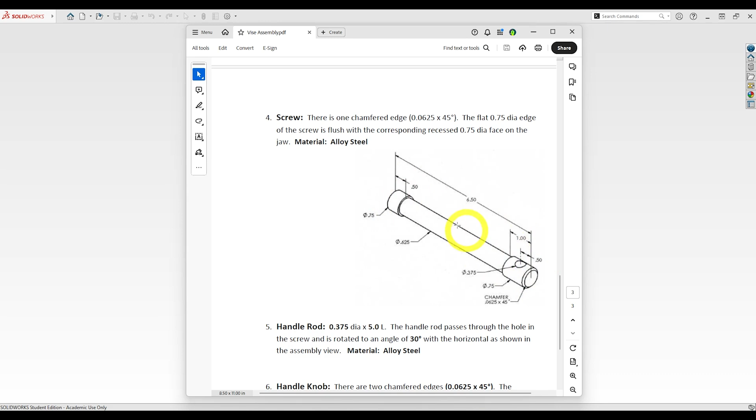Welcome everyone to our next video tutorial where we're going to make the screw for our vise assembly. Looking at this screw, probably the easiest way to make this is to revolve it. So I'm going to cut it in half, draw half of it, the top half, spin it around itself, and then come back and do the hole going through the middle. Let's go ahead and get started.

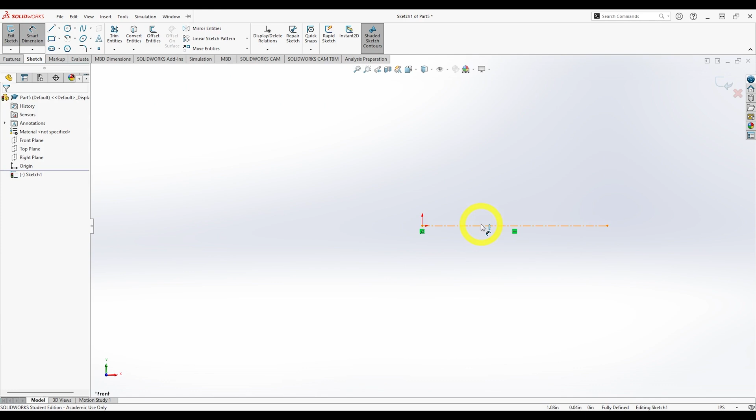Go to new part. Sketch, front plane. I'm going to start with my construction line going down the middle, and I'm going to dimension that real fast. Then I'm going to go ahead and draw my shape.

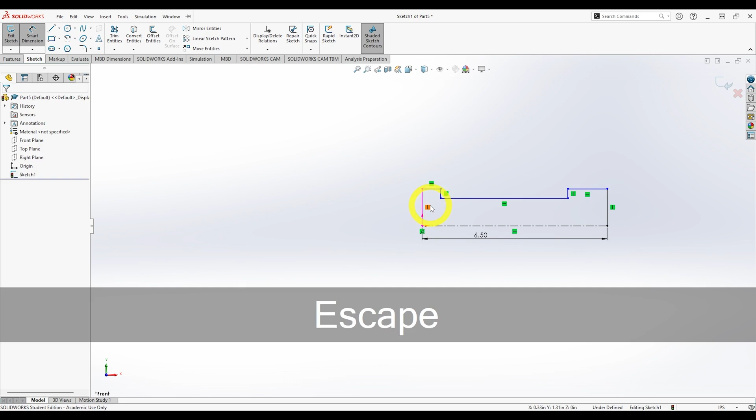All right, let's go ahead and dimension this. I accidentally selected the center point, I want to select the line instead. Remember, if I stay above my construction line, it's essentially a radius. If I go below it, it becomes diameter, which is what I want.

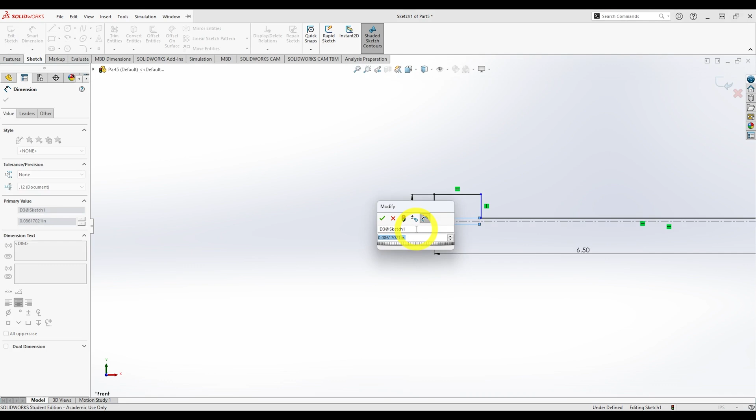And then this is also 0.75, so I'm going to just click on that and click that dimension to make it the same. All right, let's go ahead and do our horizontal dimensions.

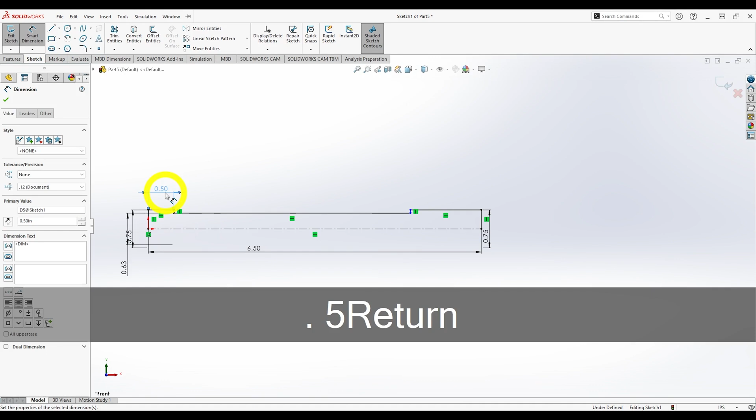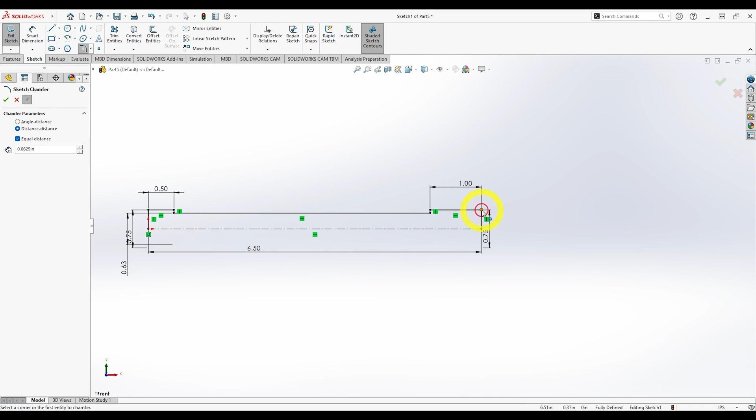And then lastly, we see there's a chamfer here at the end, a 0.0625 inch chamfer. So I'm going to select the drop down where it says fillet, and go to chamfer. Oh, I gotta type my dimension first. All right, and there we go, we have now our chamfer.

All right, let's go back over to features, revolve. This is just going to draw a line across the bottom, which is perfectly fine with me. And I'm going to check, and there we have our screw.

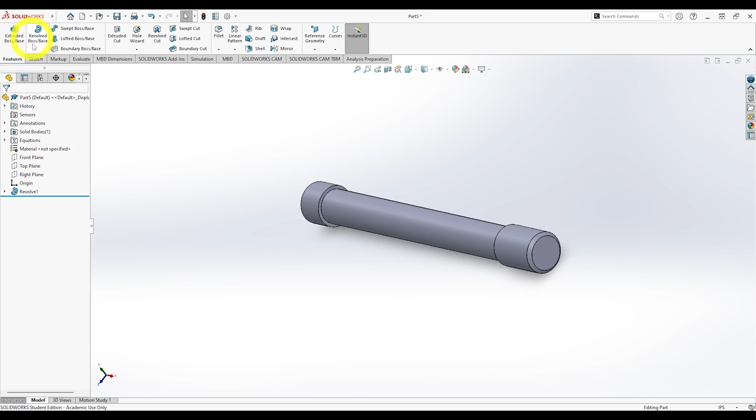Now I need a hole going through the middle. So I'm going to go to sketch, and I need to have a work plane in the middle. I know my original work planes, the top, front, and side views, go right through the middle. So I'm going to scroll down here, go to my top plane, and this is going to look directly through the middle.

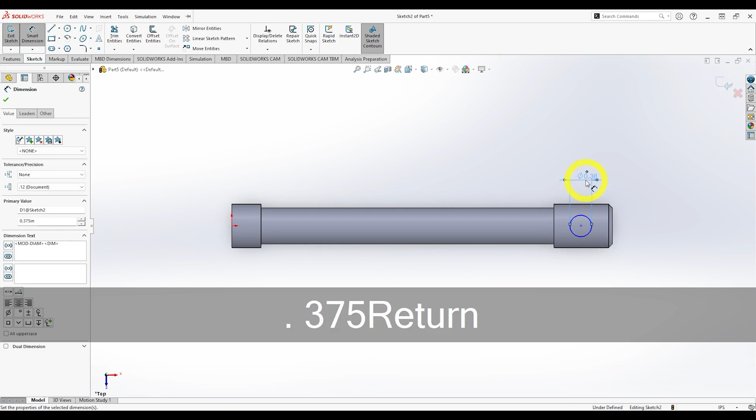So I can just draw my circle that I want and dimension that circle. And then the location of that circle matters too. Now it's not fully dimensioned yet because I can move it back and forth, so I'm going to need to center it as well.

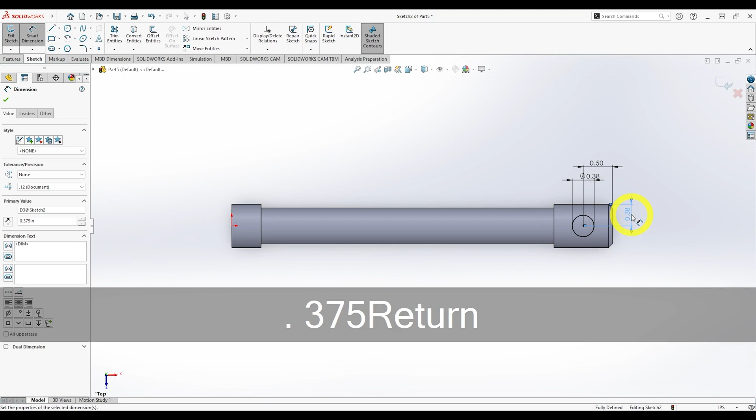Which is 0.375. And then I'm going to go to extrude cut and do direction 2 through all. Direction 1 is through all. Click OK. And there we have our holes.

All right, let's go ahead and change our material to cast alloy steel. Save this part. And that is it for our screw.